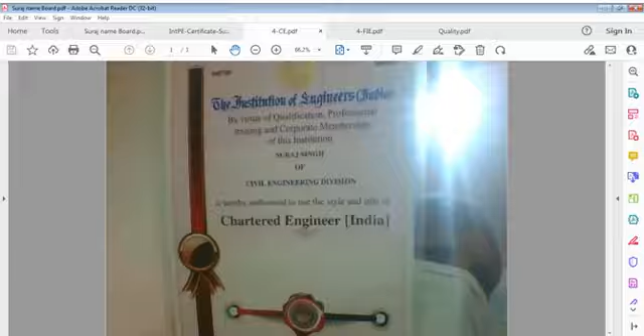Quality for me is a big concern. It's not a question of whether I'm interested or not interested. That's not the question here. There's something else. You cannot say that it's my preference. It's not a preference, it's in fact a requirement. And particularly when one is an engineer, it is the duty of the engineer to be very serious about the issue of quality. And of course, concrete is life, and we should be very serious about that.

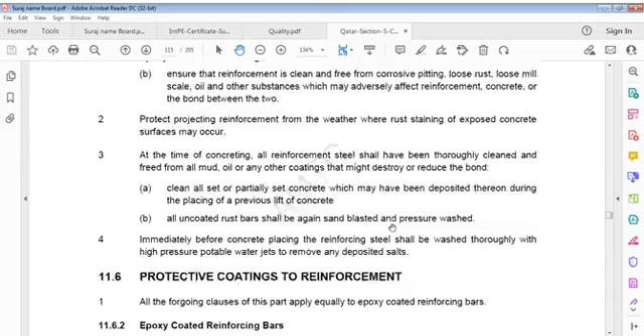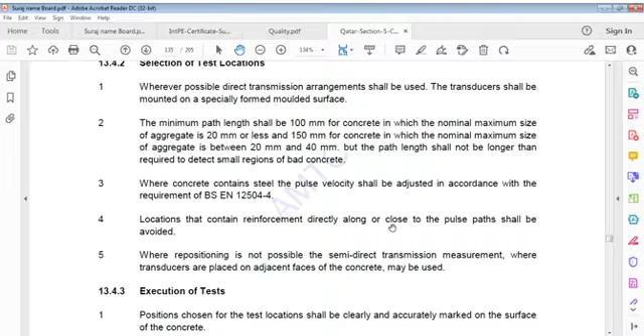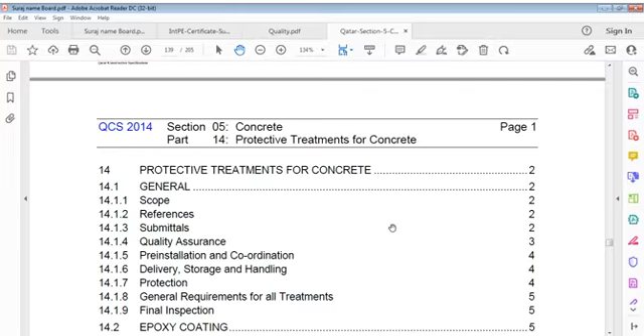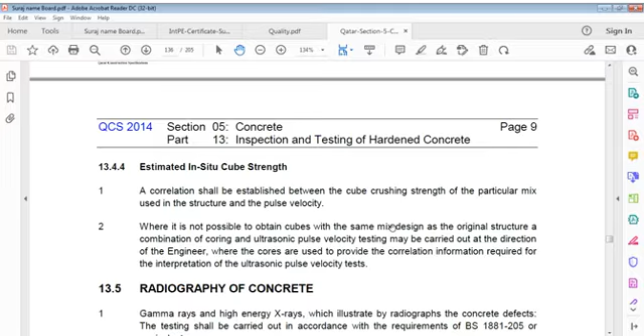And it's a very, very serious issue. We may say without quality, no one can move. It's not possible to move without quality. Though we may say we are maintaining quality, in fact we do not maintain quality and just move on and on. And that's where we have to be very serious about that issue. Why do I always talk every day? It's my passion that I have to disseminate at least

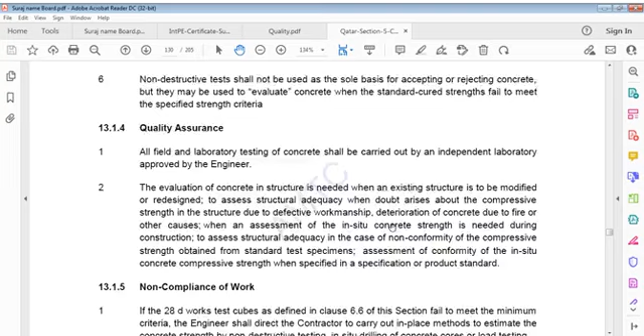quality can never be compromised and should not be compromised. But it happens. Who bothers? My question is, who bothers? No one bothers. Why should someone bother? People think it moves on and on and on. It's not my question for you or for someone else. Quality is a very serious matter. It's not a matter in engineering itself. In fact, it's a matter of life. No quality means what is there then?

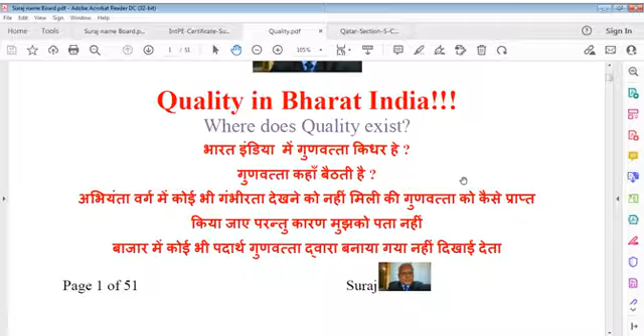I don't find any product in market which looks like or which presents itself well, except its package. The package is nice, but except for the package, the delivery package, I don't find any product, or you can say quality product. That's the important point.

Quality certification is delivered, is declared not on reality but on a general procedure. The quality certificate is not based on reality, it has just become a common process. I don't think it's more than that.

Whether it is government or private institution or organization, there exists no quality at all, and there is no one to question why there is no quality. What is the reason for that? No one is there, nobody exists, or nobody has got the courage to question.

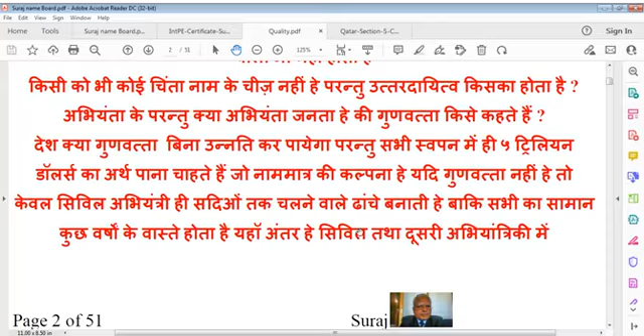If you want to see a difference, you will find that this is the one difference between civil and other engineering. Civil engineers, I'm not saying they are more powerful, it's not a question of that. It's a question of involvement, that civil engineers have to work much more than required, because their products - structures, houses, dams, facility plants, civil works - have to work for coming decades, and just like buildings and housing, they are transferred to generations to come.

But if you buy a television set or a computer, you have no plans that it should last 100 years, because non-civil engineering technologies change a lot. You always find updates every 3 days, 4 days, 1 week. But in civil engineering, the update of knowledge is not that fast, yet the work is very hard.

And therefore we say seriousness is very important. If you are not serious, I don't think we are right. That's why we say nobody has the concern that they should have. Everybody should be concerned about why we have lost quality.

First question is, why did we lose it after all? Or did we have that quality before? That is also a question mark. And if we did not have that quality, what was the reason for that? That's also another question. But it's not difficult.

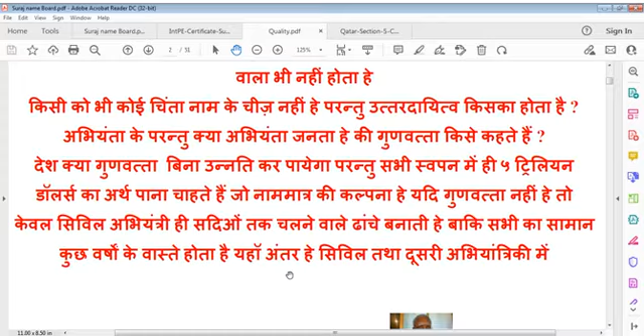You have to think not only of the whole design, we have to think of every part of that design, every member of that design framework, and then we have to take decisions on every beam and column, every thin slab. Whatever we do, we have to consider each and every aspect of design, and then we have to keep in mind whether or not this design shall be constructible. It should not cause any problem in construction. And that's what we say: quality of design, quality of thinking, quality of everything, production, are very important.

And when you think of other civil engineering items which are also very important, that's what I can say. And when you go to the world of concrete, it's quite different. I'm not jumping onto that, but quality criteria is very different in our life and should be different. We cannot leave it to itself.

When we study in college, in university, I think we are kept off quality. And we are kept off quality because maybe at that time, students cannot understand what is quality. Students mix up, and time is very short. Possibly 4 or 5 years in education of engineering is nothing.

To the extent civil engineering is concerned, it's such a wide field, which involves everything from toilets to palaces, all facilities. It involves drains, sewer lines, water lines. It involves buildings, involves networks of irrigation, dams or water resources, and you can say even power stations, nuclear power stations, airports. I think there's something maybe we do not know, but every work that involves primarily other disciplines, other branches of engineering, basically has to start with foundations, and foundations mean civil construction and civil designs.

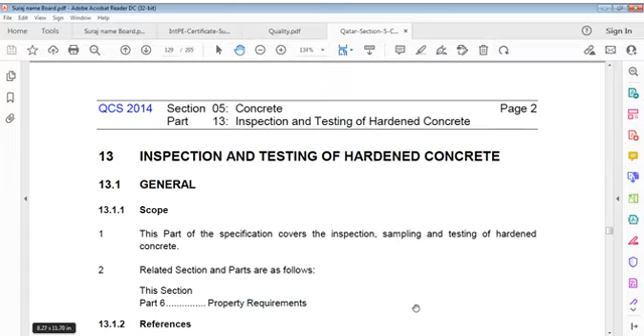I come back to concrete because you say he is running in the other direction. I don't run in the other direction. I run to concrete, and that's inspection. Here you can see inspection and testing of hardened concrete.

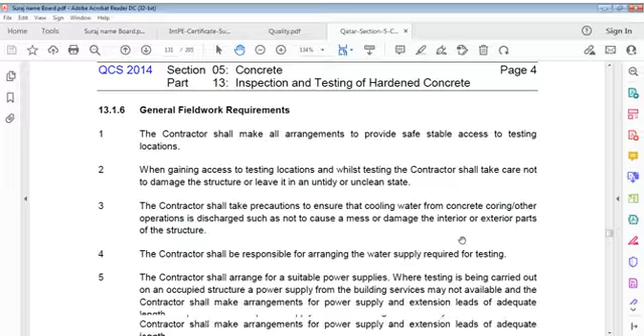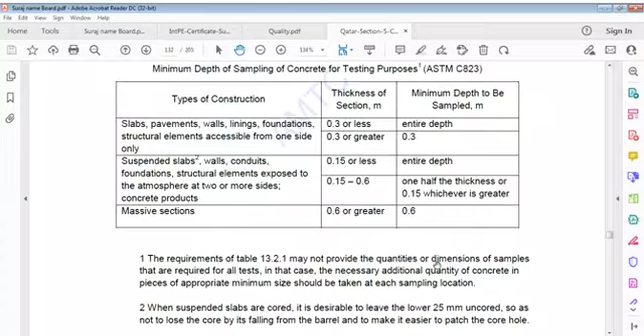We talked about these details. Concrete cores we talked of, and about the minimum depth of sampling of concrete, how to take cores, how to drill cores, and also testing of strength and assessment of strength. We talked of reinforcement cover measurements, how to take that and how to detail it out.

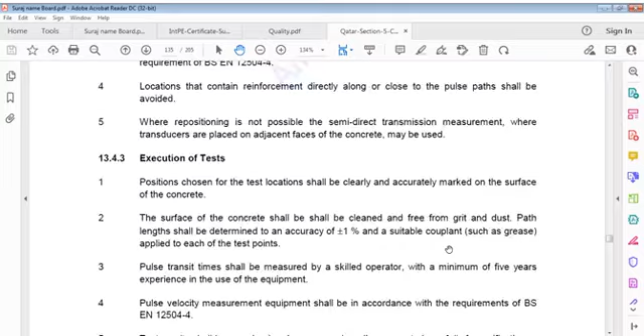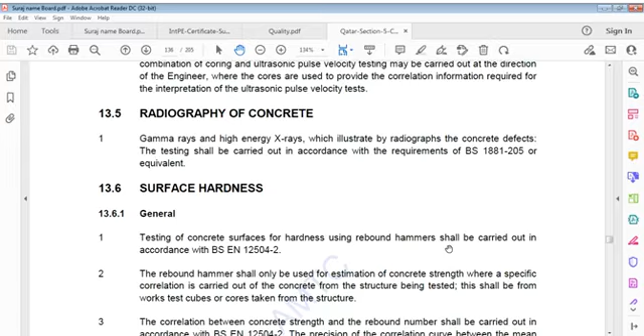Then ultrasonic pulse measurements, selection of test locations, estimated site cube strength, radiography of concrete, surface hardness. I don't know whether we reached there or not. I am not sure about that. I think it was chemical content.

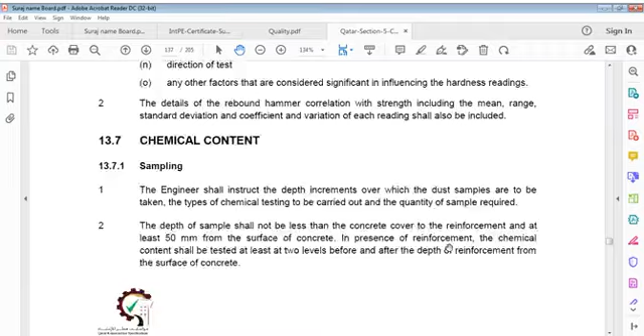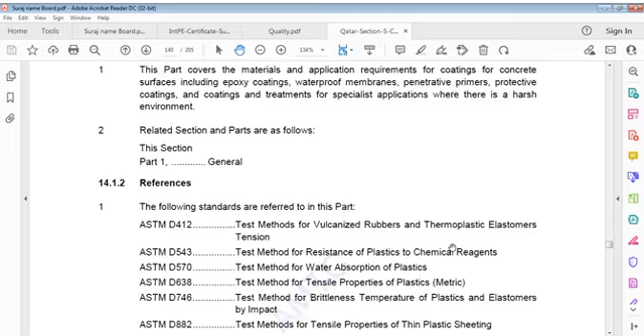Let us see which page it was. I don't exactly remember. What's this? Protective treatment of concrete. Here it is. I didn't talk of that, I'm sure. We did not go this far. I forgot actually where the last talk stopped. So should I go back to see where it was? I will just waste time.

Reinforcement cover measurements. Just a minute, give me a minute so I can open the file and see what it was. It should not be that difficult. Let's try to open it. I'm opening the last video to see whether it works or not. Let me find where it is. Just a moment, please. I'm trying to find where it is. I'm closing that file.

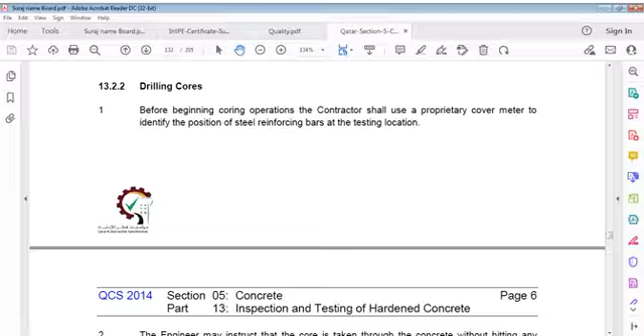No, I'm not able to find that. I was just trying to open that video to see which page it was, but I'm not able to find it. My god, this page opened unnecessarily. Sorry, I should close that one. No problem. So we said drill cores, we talked of cores and we drilled them. Sometimes it's too difficult really. We can't help that.

I think it was radiography of concrete. Radiography of concrete, gamma rays and high energy X-rays, which illustrate by radiographs. Alright, so I'll go there and see.

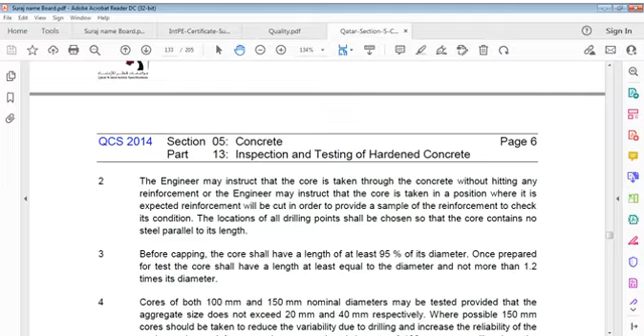Ultrasonic pulse measurement. I start at page number 136. I'm able to find that now. So estimated in situ cube strength we are talking of, page number 136 of that specification. It says a correlation shall be established between cube crushing strength of the particular mix used in the structure and pulse velocity.

Where it's not possible to obtain cubes with the same mix design as the original structure, a combination of coring and ultrasonic pulse velocity testing may be carried out at the direction of the engineer, where cores are used to provide correlation information required for interpretation of ultrasonic pulse velocity tests.

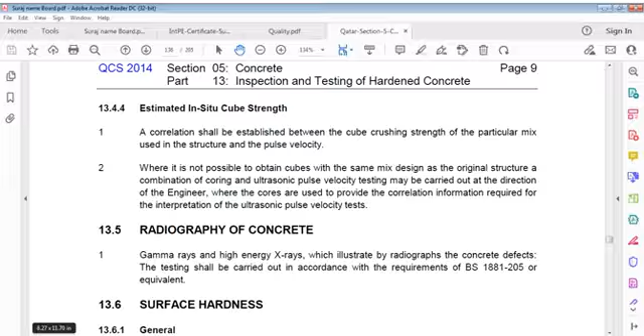Now, radiography of concrete, gamma rays and high energy X-rays, which illustrate by radiographs concrete defects. Testing shall be carried out in accordance with the requirements of BS 1881-205 or equivalent. Now, surface hardness.

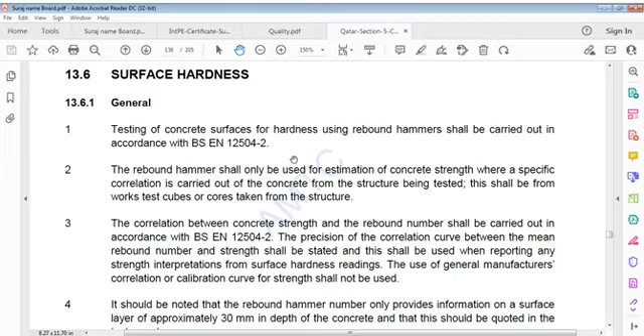Testing of concrete surfaces for hardness using rebound hammers shall be carried out in accordance with BS EN 12504-2. Rebound hammers shall only be used for estimation of concrete strength where a specific correlation is carried out for concrete from the structure being tested. This shall be from work test cubes or cores taken from the structure. Correlation between concrete strength and rebound number shall be carried out in accordance with BS EN 12504-2.

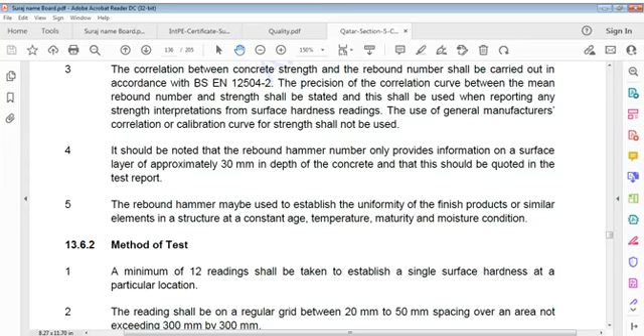Precision of correlation. Precision of the correlation curve between mean rebound number and strength shall be stated, and this shall be used when reporting strength interpretations from surface hardness readings. General manufacturer's correlation or calibration curves for strength shall not be used.

Let us say again, correlation between concrete strength and rebound number shall be carried out in accordance with BS EN 12504-2. Precision of the correlation curve between mean rebound number and strength shall be stated, and this should be used when reporting strength interpretations from surface hardness readings.

Use of general manufacturer's correlations or calibration curve for strength shall not work in that case. It should be noted that rebound hammer number only provides information on a surface layer of approximately 30 mm in depth, only 3 cm in depth of concrete, and that this should be quoted in the test report. Again I say, it should be noted that rebound hammer number only provides information on a surface layer of approximately 30 mm in depth of concrete, and that this should be quoted in the test report.

Rebound hammer may be used to establish uniformity of finished products or similar elements in a structure at constant age, temperature, maturity and moisture condition. Now what's the method of test? Method of test says a minimum of 12 readings should be taken to establish a single surface hardness at a particular location. Readings shall be on a regular grid between 20 mm to 50 mm spacing.

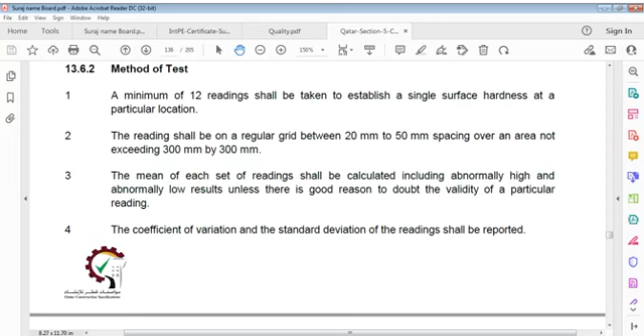In that case, equipment. What is the equipment required for this? Rebound hammer shall be a proprietary type that has been used successfully and serviced for a minimum of 5 years. Hammer shall comprise a mass propelled by a spring that strikes a plunger in contact with the surface. Manufacturers' literature shall identify impact energy and contact area of plunger for the hammer.

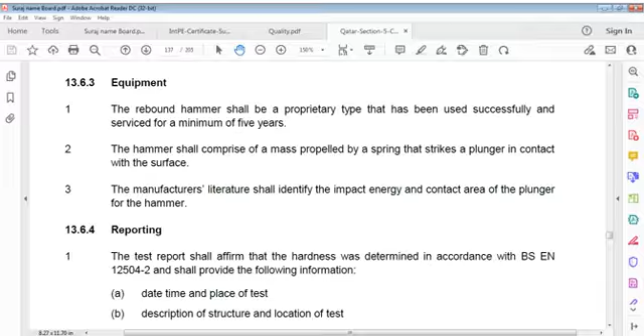Test report shall affirm that hardness was determined in accordance with BS EN 12504-2 and provide the following information. And what is that information? See, test report shall affirm that hardness was determined in accordance with BS EN 12504-2 and provide the following information: date, time and place of test. Hammer test I'm talking, date, time and place of test, description of structure and location of test, details of concrete,

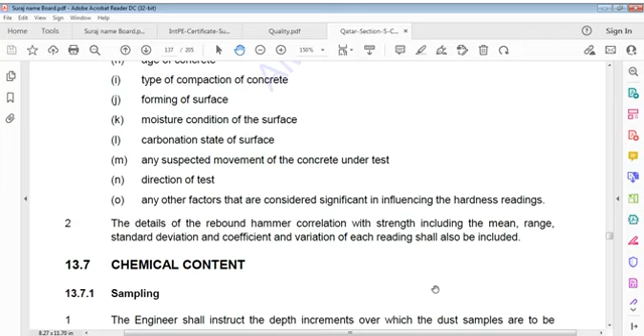type of cement, cement content, type of aggregate, type of curing, age of concrete, type of compaction of concrete, forming of surface, moisture condition of surface, carbonation state of surface, suspected movement of concrete under test, direction of test, or whatever other factors are considered significant in influencing hardness reading. What the requirement is, this report should contain date, time and place of test. This is primary information, what time it is, what date it is, what place it is.

What is the structure? You have to give a small description of the structure, its location in vertical direction or horizontal direction, and details of concrete, grade, etc. Cement, what cement we used, or cement content, how many kilograms, what type of aggregate, limestone or igneous, limestone or gabbro, or whatever else. Curing, what sort of curing was done, and what's the age on this test day, and then what method was used for compaction of that concrete, and forming of surface,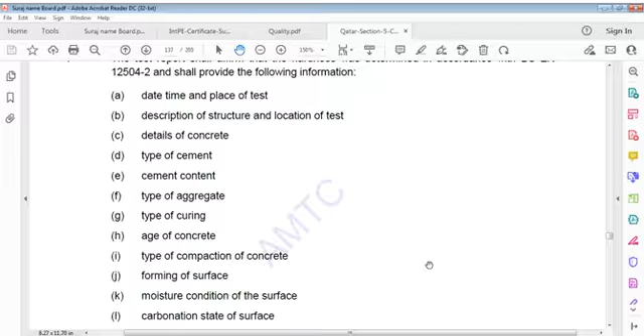moisture condition of surface, moisture content you may say, then carbonation state of surface, and suspected movement under test, but I don't think that's very important, but direction of test and whatever other factors we consider significant in influencing hardness readings. Details of rebound hammer correlation with strength, including mean, range, standard deviation and coefficient of variation of each reading shall also be included.

Good information, of course, this is, and we have to see the rebound hammer test. If you go and see how it looks, you can find the rebound hammer, and let us see how this works. If you see, you can see, sometimes we have to be a little patient in understanding what we will do.

As some information is available, I'd like to show you this. In fact, it's a very important one from many points of view. I have to consider that. I was trying to show you how it works, because we are reading the specifications, but we should also refer to something in reality, if we can find something reasonably good and workable. I'm not getting its print easily.

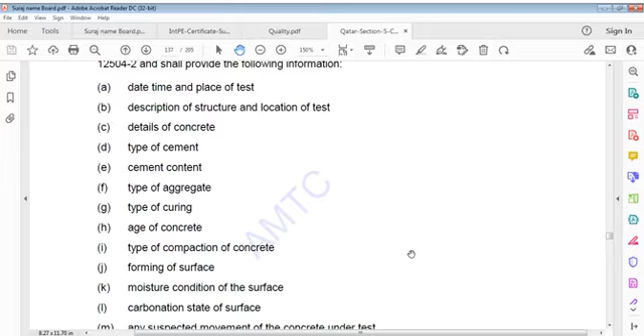We can see this list again: reporting, what to report: date, time and place of test, description of structure and location of test, details of concrete, type of cement, cement content, type of aggregate, type of curing, age of concrete, type of compaction, forming of surface, moisture conditions, carbonation state of surface, suspected movement of concrete under test, direction of test, factors considered significant in influencing hardness readings.

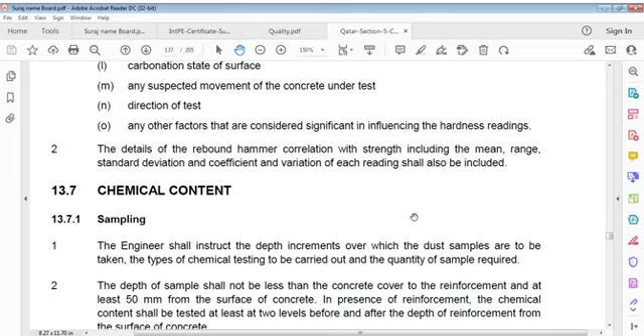Details of rebound hammer correlation with strength, including mean, range, standard deviation, and coefficient of variation of each reading shall also be included. Now we come to chemical content. Chemical content.

Engineers shall instruct depth increments over which dust samples are to be taken, type of chemical testing to be carried out, and quantity of sample required. Depth of sample should not be less than concrete cover to reinforcement, and at least 50 mm from surface of concrete. In presence of reinforcement, chemical content shall be tested at least 2 levels before and after depth of reinforcement from surface of concrete.

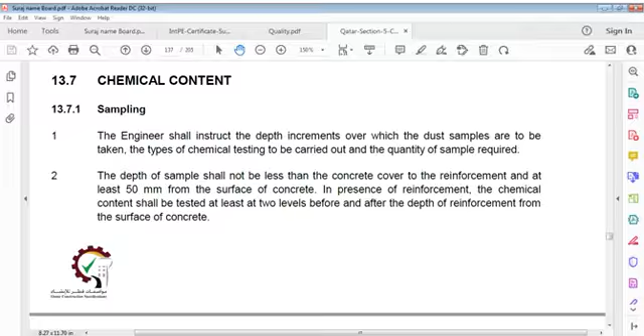To provide uniform samples of cement, matrix, and aggregate, 3 separate holes shall be drilled at one location. Diameter of hole shall be between 12 and 20 mm, half inch to 3/4 inch. Diameter of holes shall be between 1.2 cm and 2 cm.

Care shall be taken to discard material from whatever render or finish unless this is specifically required under investigation. Care shall be taken to ensure that dust increments are accurately measured by marking drill bits. Dust sample increments shall be carefully transferred to plastic bags and sealed to avoid contamination. Each sealed bag shall be uniquely identified by sample identification and depth increment.

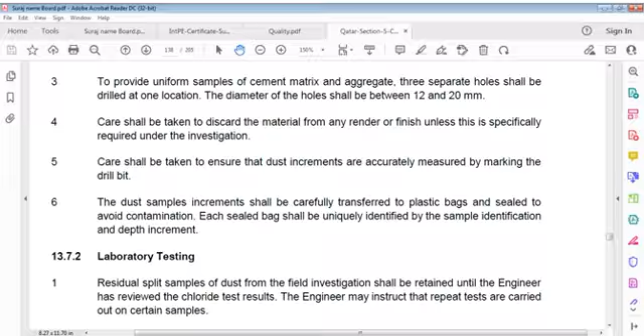Laboratory testing. Residual split samples of dust from field investigation shall be retained until the engineer has reviewed chloride test results. Engineer may instruct that repeat tests are carried out on certain samples. Chloride testing of concrete dust samples shall be by an acid soluble method in accordance with BS 1881, Part 124. Results shall be reported to 2 decimal places. Sulfate testing of concrete dust samples shall be in accordance with BS 1881, Part 124, using an acid soluble method.

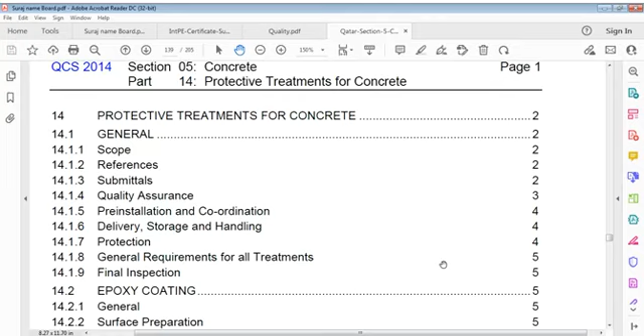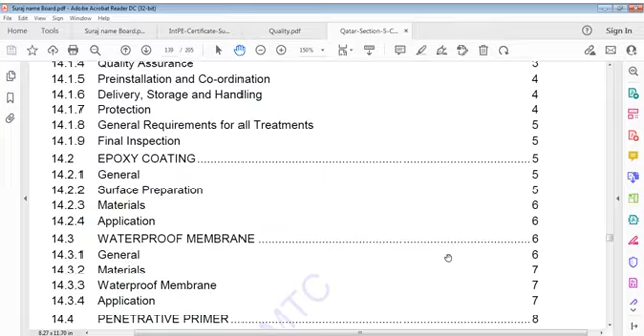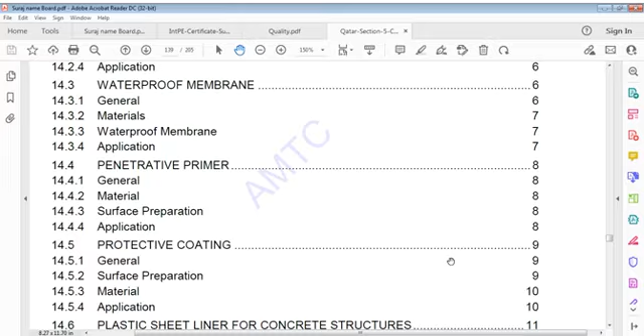Now we are going to protective treatment of concrete. Protective treatment for concrete. In this we have general, and that is scope, references, submittals, quality assurance or requirement, pre-installation and coordination, delivery, storage and handling, protection, general requirements for all treatments, final inspection, epoxy coating, general, surface preparation, materials, applications, waterproof membrane, general, materials, waterproof membrane application, penetrative primer, general, material, surface preparation.

Application, protective coating, general, surface preparation, material, application, plastic sheet liner for concrete structures, general, shop drawings and submittals, liner material requirements, plastic sheet liner properties, basic sheet dimensions, liner details, installation, testing requirements, special requirements, joints in lining for in situ concrete structures, testing and repairing damaged surfaces. Protective treatment for concrete, general.

Now, this part covers materials and application requirements for coatings. Coatings, I'm saying treatment, you can call it coating also. Coatings for concrete surfaces, including epoxy coatings, waterproof membranes, penetrative primers, protective coatings, and coatings and treatments for specialist applications where there is a harsh environment.

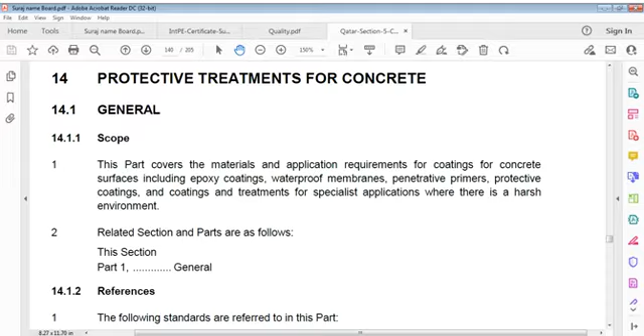So here we have what? Epoxy coating, that is number one. Epoxy coating, waterproof membrane, primer that can penetrate into concrete, protective coatings also, and coatings and treatments for specialist applications where a harsh environment exists. And this is in the general section that relates to it because it is protection.

We have references, and these are test methods for vulcanized rubbers and thermoplastic elastomers in tension, method for resistance of plastics to chemical reagents, method for water absorption of plastics, method for tensile properties of plastics, method for brittleness temperature of plastics and elastomers by impact, methods for tensile properties of thin plastic sheeting, test method for pressure sensitive adhesive coated tapes used for electrical and electronic applications.

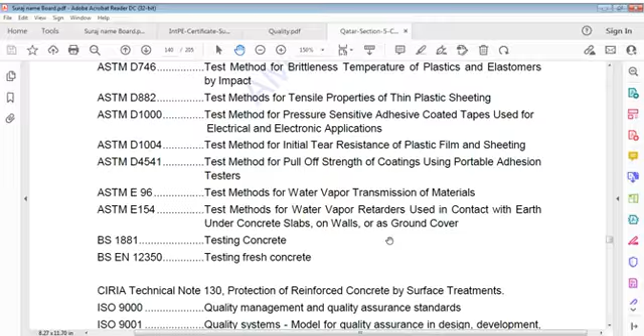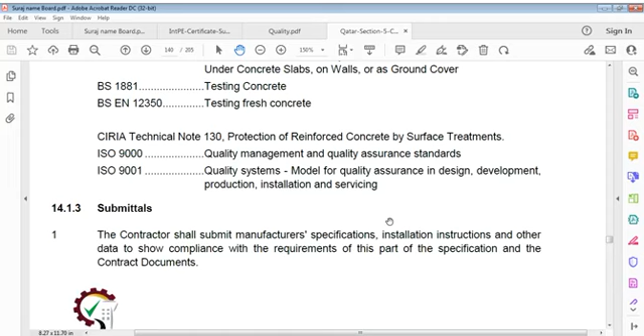Method for initial tear resistance of plastic film and sheeting. Test method for pull-off strength of coatings using portable adhesion testers. Test methods for water vapor transmission of materials. Test methods for water vapor retarders used in contact with earth, under concrete slabs, on walls or as ground cover. Testing fresh concrete, then protection of reinforced concrete by surface treatments. Then quality management and quality assurance standards, quality systems, model for quality assurance in design, development, production, installation and servicing.

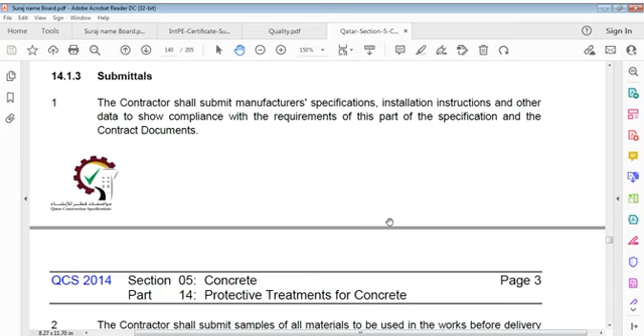These are references only. Numbers are there, you can read yourself. I am not wasting time on that. It's already there, just announcement of contents was important. So there are so many here. Submittals. Contractor shall submit manufacturer's specifications, installation instructions and other data to show compliance with requirements of this part of specification and contract documents.

Contractor shall submit samples of all materials to be used in works before delivery of materials to site. That's very general. We cannot deliver any material if it's not approved or the sample is not well tested. So without approval, you should not get material to site. That is a very common requirement everywhere, in every specification.

This is a principal requirement. Samples of membrane waterproofing shall be 300 mm square. Membrane waterproofing sample you submit should be 300 by 300. And samples of liquid components shall be a minimum of 1 liter. So you have to submit a sample of liquid membrane of about 1 liter, and if it's a sheet, 300 by 300 mm square.

Contractor shall submit comprehensive test results for protective coating system per test in specification, which clearly indicate whether values are mean values measured in current production or minimum values below which the property does not fall. Contractor shall clearly state chemical composition of material and process by which protection is given to concrete.

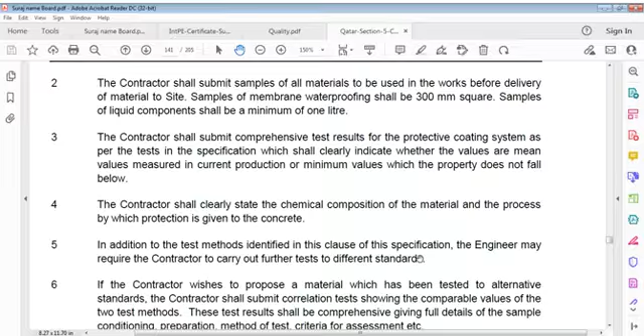Contractor shall submit comprehensive information of previous applications of that material in similar conditions and environments. This information must include project name, type, grade of material used, quantity of material used, name of client, name of consultant, name of contractor. If requested by engineer, contractor shall supply contact details of client, consultant or contractor where material was previously installed.

Contractor shall submit a guarantee for protective coating system and workmanship. Guarantee shall be worded to reflect required performance of material and be approved by engineer. Guarantee shall be worded to include the phrase: contractor shall, at convenience of employer, effect all repairs and replacements necessary to remedy defects, all to complete satisfaction of engineer. This is what the phrasing is.

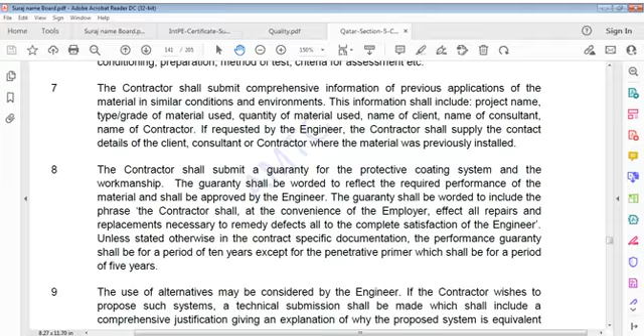Use of alternatives may be considered by engineer if contractor wishes to propose such a system. A technical submission shall be made which includes a comprehensive justification giving an explanation of why proposed system is equivalent or superior to the one designated.

Quality requirement or assurance. Protective coating system shall be supplied by a manufacturer who is certified to ISO 9000 series of quality standards. Contractor shall submit to engineer a copy of ISO 9000 series certificate that clearly states scope of certification.

Protective coating system shall be supplied by manufacturer who provides technical assistance on suitability for application and installation of material. For initial use of material on site, contractor shall arrange for a technical representative of manufacturer to be present to demonstrate correct use of material.

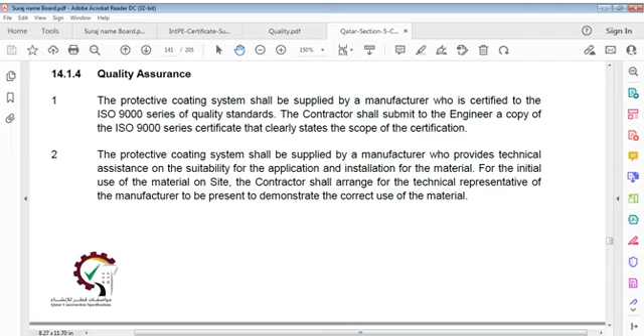Repeat. Protective coating system shall be supplied by a manufacturer who provides technical assistance on suitability for application and installation of material. For initial use of material at site, contractor shall arrange for technical representative of manufacturer to be present to demonstrate correct use of material. Means site demonstration is required.

Protective coating system shall be applied by contractor or subcontractor who is certified to ISO 9000 series of quality standards. Contractor shall submit to engineer a copy of ISO 9000 certificate that clearly states scope of certification. Again I say, ISO 9000 certificate is not done by us, it is done by a third party body, but it gives compliance to ISO 9000.

So here is what it says: copy of ISO 9000 certificate, series of standards is included.

Engineer may permit use of an applicator who is not certified, but if the applicator works to a quality system approved by the engineer, it's okay.

Works shall be executed by an approved specialist subcontractor having a minimum 5 years successful experience in installation of specified material. Only tradespersons experienced with installation of materials specified shall be used. No other tradesperson shall be allowed, only those who know how this work is done.

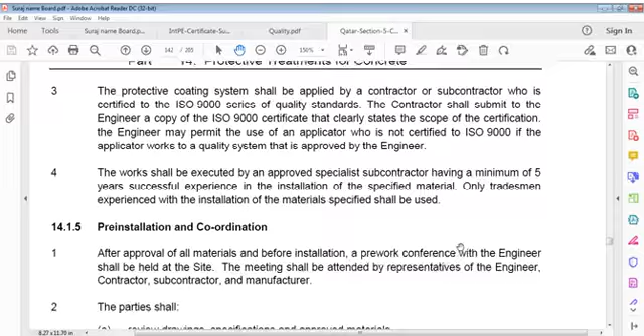These parties shall review drawings, specifications and approved materials. They will review all these drawings, specifications and approved materials, and correct conflicts if any exists between approvals and specification requirements.

Examine site conditions, including inspection of substrate, material labels and methods of storing materials. Review installation procedures and scheduling, and review protection methods for finished work from other trades.

Before applying coating system to permanent works, contractor shall carry out a small trial of coating system for review and approval of engineer. So what do these parties who are present here have to do with this?

What shall we do? Again in a nutshell: read and review drawings, specifications and approvals. If there is some conflict, resolve it. Conflict may be between approvals and specifications or somewhere else also. Go to site and examine how it works.

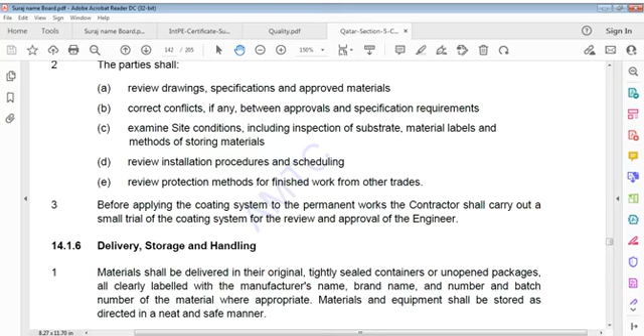Materials and equipment shall be stored as directed in a neat and safe manner. Storage areas shall comply with manufacturer's requirements with regard to shade, ventilation and temperature limits, and be located away from all sources of excess heat, sparks or open flame.

Containers of liquid material shall not be left open at any time in storage area—this is a safety issue. Storage areas shall comply with manufacturer's instructions with regard to shade, ventilation and temperature limits, and be located away from all sources of excess heat, sparks or open flame.

Containers of liquid material shall not be left open at any time in storage areas. Materials not conforming to these requirements shall be rejected by engineer and removed from site, and then replaced with approved material.

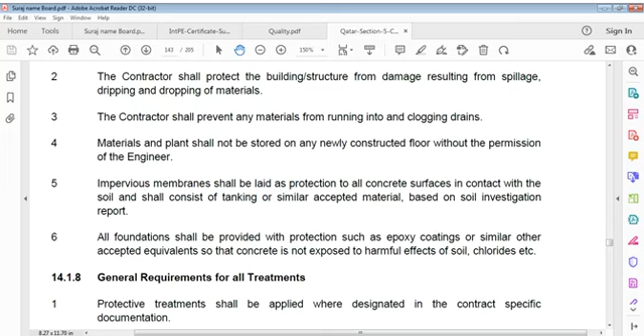General requirements for all treatments. Protective treatments shall be applied where designated in contract specification documents. Protective coating systems to be used shall be applied strictly in accordance with manufacturer's recommendations.

Contractor shall take all necessary precautions against fire and other hazards during delivery, storage, and installation of flammable materials specified herein, and comply with any regulations imposed by the Civil Defense Department of the Ministry of Interior in respect of storage and use of hazardous materials required under this section. Important point.

Contractors shall take all necessary precautions against fire and other hazards during delivery, storage, and installation of flammable materials specified herein, and comply with any regulations imposed by the Civil Defense Department of the Ministry of Interior in respect of storage and use of hazardous materials required under this section.

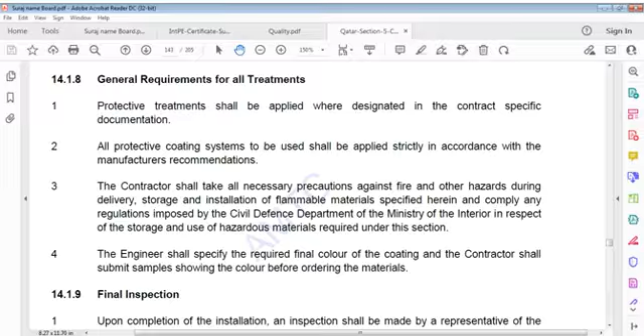Final inspection. Upon completion of installation, an inspection shall be made by a representative of the material manufacturer in order to ascertain that the system has been properly installed.

Epoxy coating. Coating shall be a decorative, flexible, high solids, epoxy polyurethane coating applied in two coats to a dry film thickness of 200 micrometer minimum. This is general: coating shall be decorative, flexible, high solids, epoxy polyurethane coating applied in two coats to a dry film thickness of 200 micrometer.

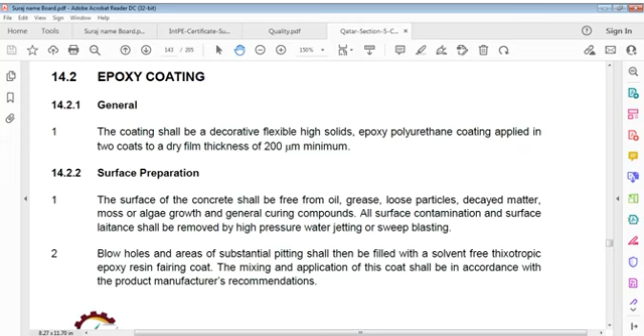Where surface cracking is apparent, these cracks shall be chased by an approved mechanical means to the depth of the crack. A thixotropic epoxy resin shall be applied using a trowel, scraper, or filling knife, ensuring that full compaction is achieved into the chased section and providing a flush finish with the concrete surface.

A minimum period of 24 hours shall be allowed before applying any subsequent protective coating system. Materials.

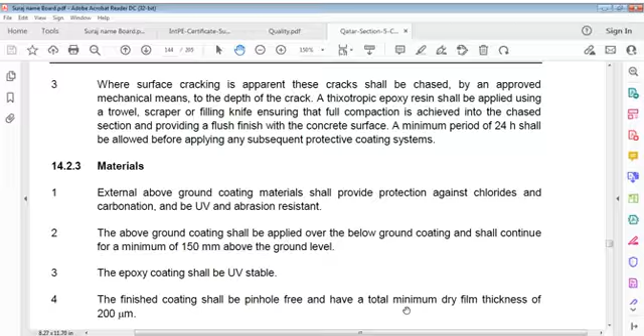We can say materials used in the coating system shall comply with the following requirements. List of materials used - it's a very important list: solid content, service temperature, tensile strength, resistance against crack, adhesion to concrete, compressive strength, tensile elongation, water absorption, abrasion resistance, compressive strength, thermal coefficient of expansion.

Solid contents greater than 85%. Greater than 85%.

Service temperature: minus 20 degrees Celsius to 70 degrees Celsius. Minus 20 degrees to plus 70 degrees Celsius. It can tolerate that temperature - not exactly boiling, but in between boiling and non-boiling.

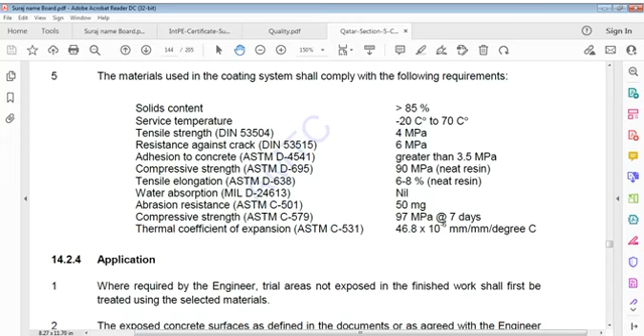Application. Application. Where required by engineers.

Trial areas not exposed in finished work shall first be treated using selected materials.

Exposed concrete surfaces as defined in documents or agreed with engineer shall be treated with material. Coating shall be applied by spray, roller or brush to achieve a finish acceptable to engineer.

In all operations of storage, mixing and application, contractor is to comply with health and safety recommendations of manufacturer and governing authorities.

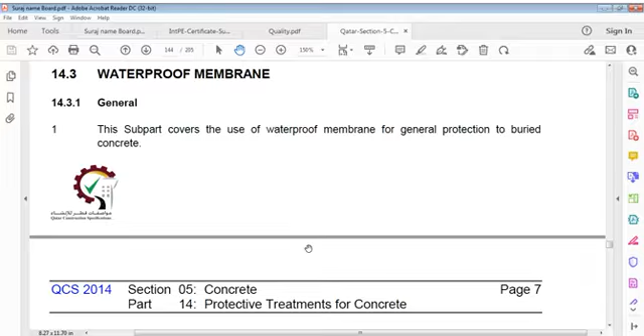Waterproof membrane. This subpart covers use of waterproof membrane for general protection to buried concrete.

Where indicated on drawings or directed by engineer, concrete in contact with ground shall be protected by a preformed flexible self-adhesive bituminous type membrane.

Laying, lapping and sealing of membrane shall be done or carried out in accordance with manufacturer's instruction.

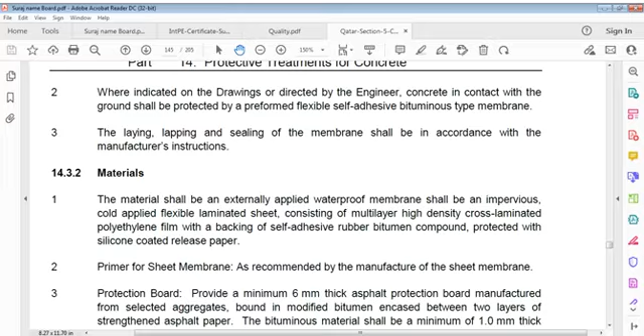Primer for sheet membrane as recommended by manufacturer of sheet membrane. Protection board: provide a minimum 6 mm thick asphalt protection board manufactured from selected aggregates, bound in modified bitumen encased between two layers of strengthened asphalt paper. Bituminous material shall be a minimum of 1 mm thick and membrane shall be capable of bridging crack widths in substrate up to 0.6 mm wide.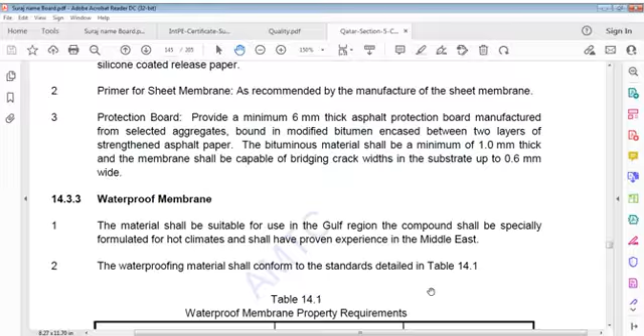Waterproof membrane. Material shall be suitable for use in Gulf region. I'm talking of Gulf region, you can check your way where you are located. It's only a reference file.

Material shall be suitable for use in Gulf region and compound shall be specially formulated for hot climate and shall have proven experience in Middle East. That is GCC, which has many countries in GCC, Gulf Cooperation Council - Muscat or Oman, Bahrain, Saudi Arabia, UAE, Doha, Qatar, etc. I think 6 or 7 maybe.

So we can say materials shall be suitable for use in Gulf countries. Compound shall be specially formulated for hot climates and have proven experience in Middle East.

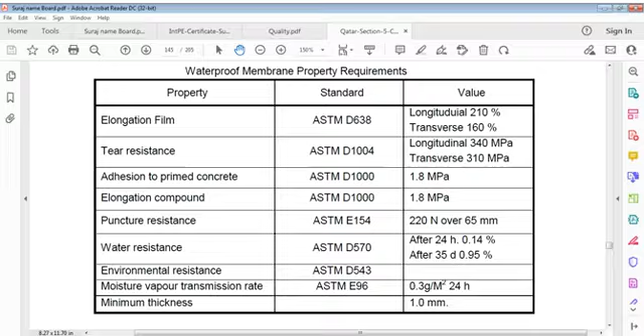Water resistance is 0.14%. I don't know what's that, water resistance. Likewise, we can say minimum thickness is 1 mm. So we'll see this later on. Now we'll move on.

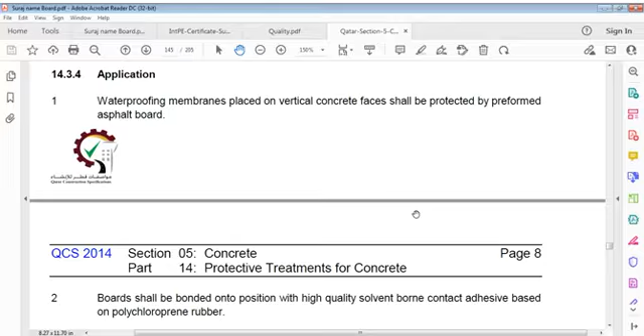Waterproofing membranes placed on vertical concrete faces shall be protected by preformed asphalt board. Waterproofing membranes that are going to be placed on vertical concrete faces are required to be protected by preformed asphalt board for many reasons. And boards shall be bonded into position.

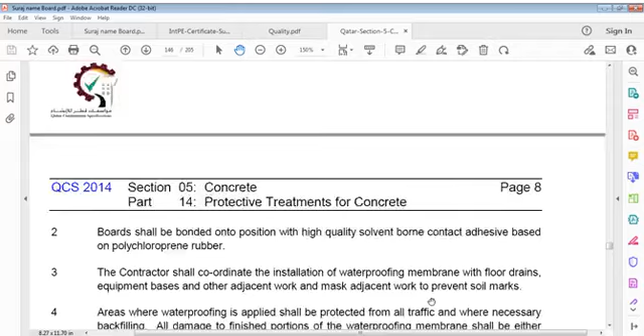Board shall be bonded onto position with high quality solvent-borne contact adhesive based on polychloroprene rubber. This is the board we are talking about. It is a protection board, that preformed asphalt board.

This board shall be bonded onto position with high quality solvent-borne contact adhesive based on polychloroprene rubber.

Contractor shall coordinate installation of waterproofing membrane with floor drains, equipment bases and other adjacent work, and mask adjacent work to prevent soil marks.

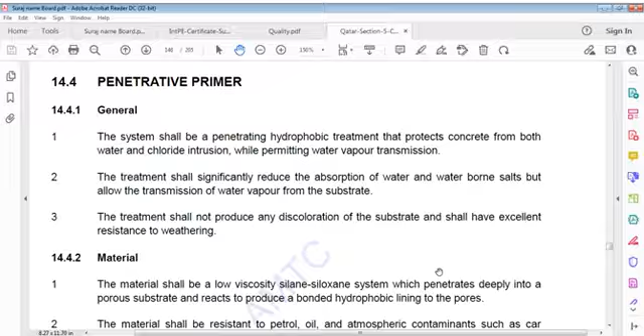Material shall be a low viscosity silane siloxane system which penetrates deeply into porous substrate and reacts to produce a bonded hydrophobic lining to pores. Material shall be resistant to petrol, oil, and atmospheric contaminants such as car exhaust fumes and industrial exhausts.

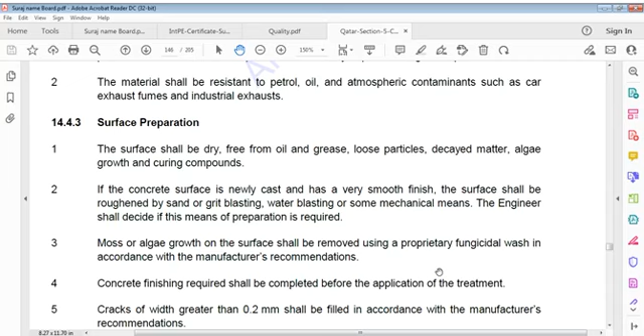Surface preparation. Surface shall be dry, free from oil and grease, loose particles, decayed matter, algae growth, and curing compounds.

Surface shall be dry, free from oil and grease, loose particles, decayed matter, algae growth, and curing compounds. If concrete surface is newly cast and has a very smooth finish, surface shall be roughened by sand or grit blasting, water blasting, or some mechanical means. Engineer shall decide if this means of preparation is required.

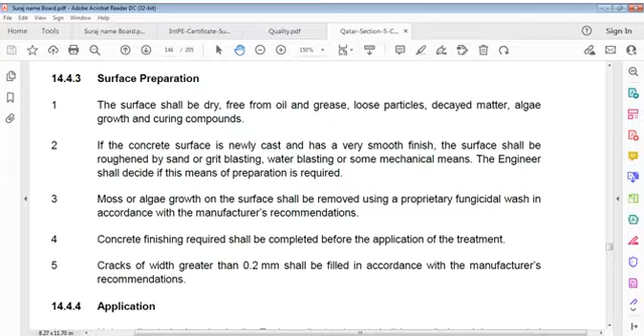Application. Unless directed otherwise by engineer, treatment shall be applied a minimum period of 24 hours after wet curing period and shall be surface dry. Surface must be dry. Contractor shall carry out test to verify depth of penetration of material.

Contractor shall carry out tests to verify depth of penetration of material. These tests shall be carried out on specimens of actual mix design and use colored dyes to trace penetration of material. Contractor shall carry out tests to verify depth of penetration of material, carried out on specimens of actual mix design, and use colored dyes to trace penetration of material.

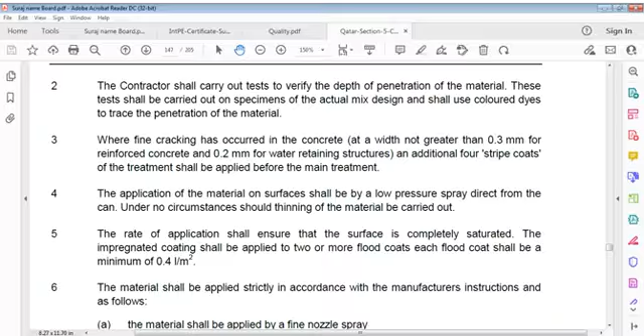Impregnated coating shall be applied in 2 or more flood coats. Shall be minimum of 0.4 liter per square meter. Material shall be applied strictly in accordance with manufacturer's instructions and as follows. Material shall be applied by a fine nozzle spray.

Application will not be permitted when ambient air temperature is above 35 degrees Celsius or in windy conditions. Surface shall be cleaned by stiff brush or compressed air to remove all loose deposits. Concrete to be treated shall be surface dry for a minimum period of 24 hours before impregnation. Membranes, joint sealers, and cast in concrete ancillaries shall be masked off before treatment.

Application shall be made by saturation flooding. Interval between application shall be at least 6 hours. Treated areas shall be protected from seawater and rain for 6 hours after treatment. Let's repeat how to apply. Material shall be applied by a fine nozzle spray. Application shall not be permitted when ambient temperature goes above 35 degrees Celsius or in windy conditions.

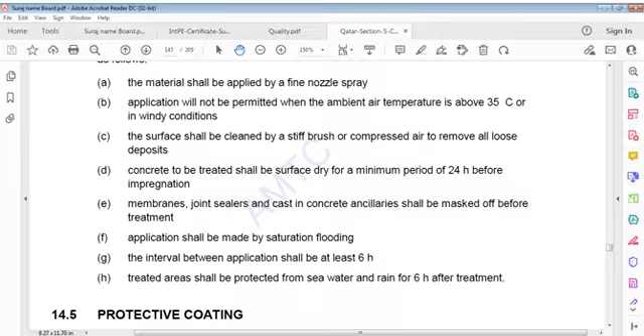Application shall be made by saturation flooding. Interval between application shall be at least 6 hours. Treated areas shall be protected from seawater and rain for 6 hours after treatment. Protective coating.

So we have gone through certain very important, very significant technical literature of concrete protection, and it's continuing, it's not finished. My purpose was to bring to you certain details about the value of concrete, how to protect it, and I think it has been a successful attempt.

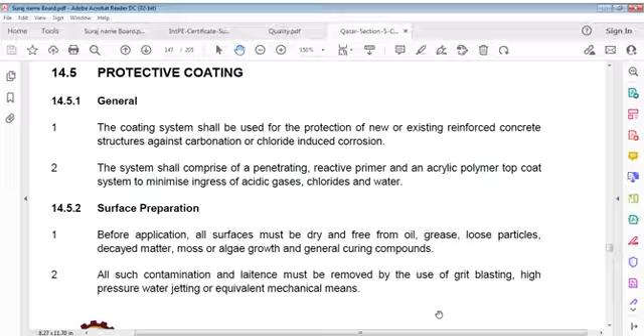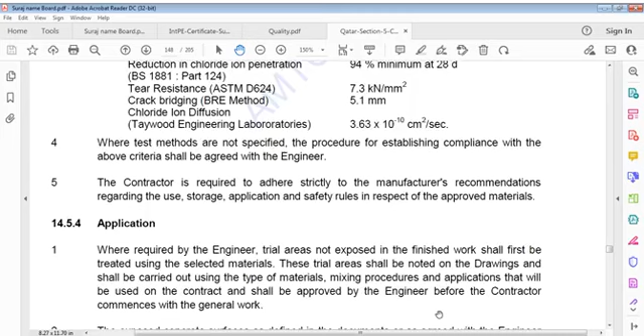I think next time I will take it up further. We have gone through page 147 of this specification of 205 pages, and that is protective coating we continue with. And then we have plastic sheet liner for concrete, etc., and many more details. We have this continuation next time. Hope we'll continue. Don't forget this protective coating, that's an important one.